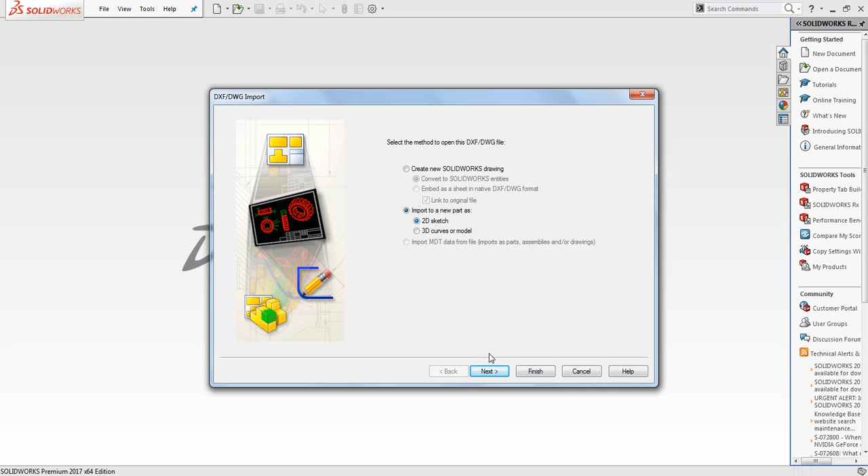Okay, so we'll go in and import or open the DXF file. Take this one here and import to a new part as a 2D sketch. Next, and then finish.

And then I go in and I'm going to delete these lines here. Once I've done that, I can select this and edit the sketch.

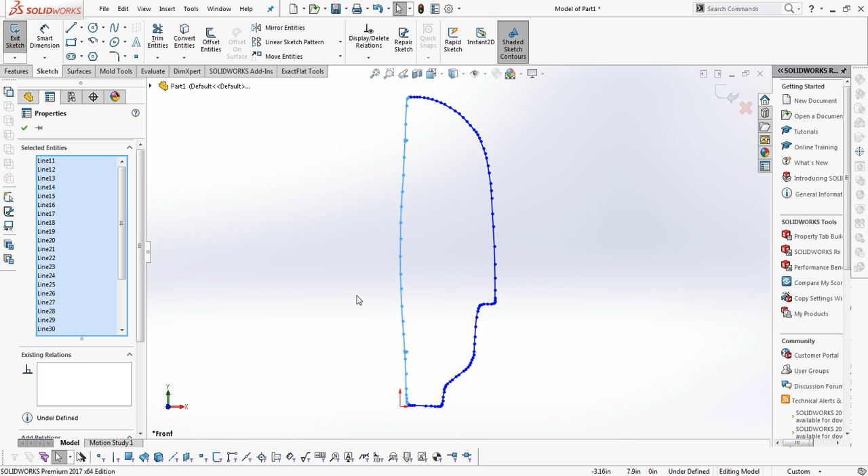Then I would select this group of targets, and go into Tools, Spline Tools, Fit Spline. Then I delete the geometry and just hit the green check box, and that's created that one spline there.

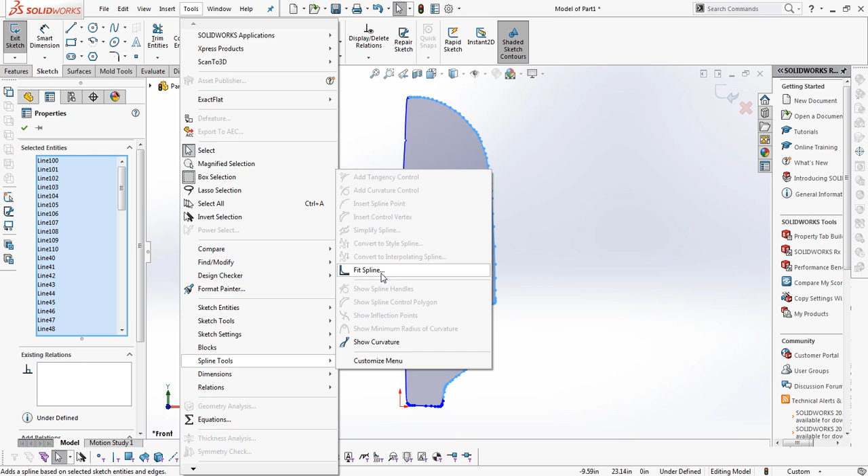And I would do the same for this section here, actually this whole section. Same thing - Tools, spline tools, fit spline.

And then these pieces here - Tools, spline tools, fit spline - and that's how we created that.

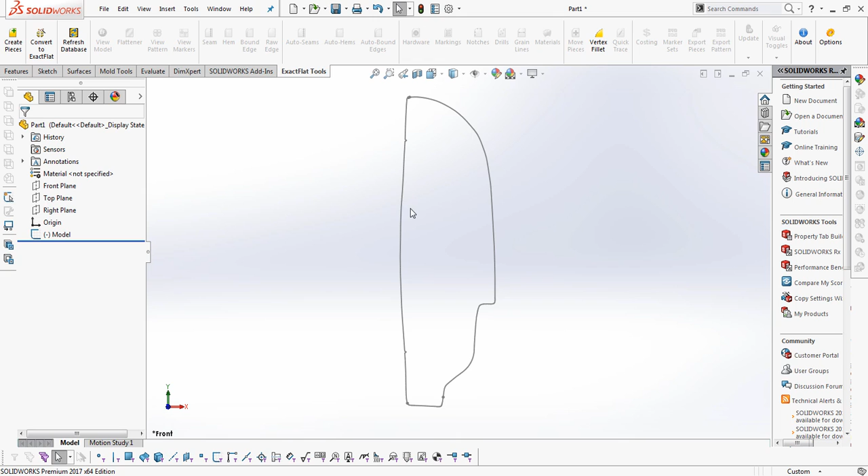Once we've got that done, I'll check that off, and then go to model, edit, insert surface planar.

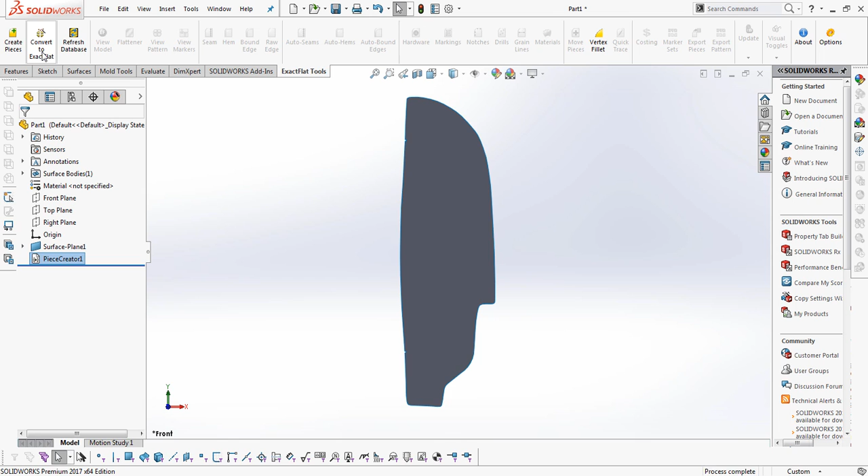So when we go to create piece, we select this, create piece, hit the green arrow, convert to ExactFlat, select the material, hit OK. You have to go through the flattener even though it's flat.

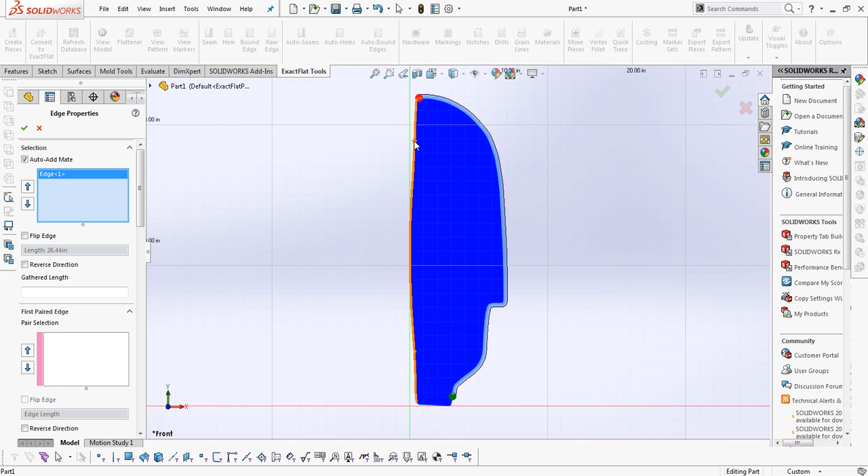Hit OK here, and then we go into our pattern view, and we can add our seams. So seam there, seam here, and seam here, and then we just go down and select what type of seam type we want, say 8 mil.

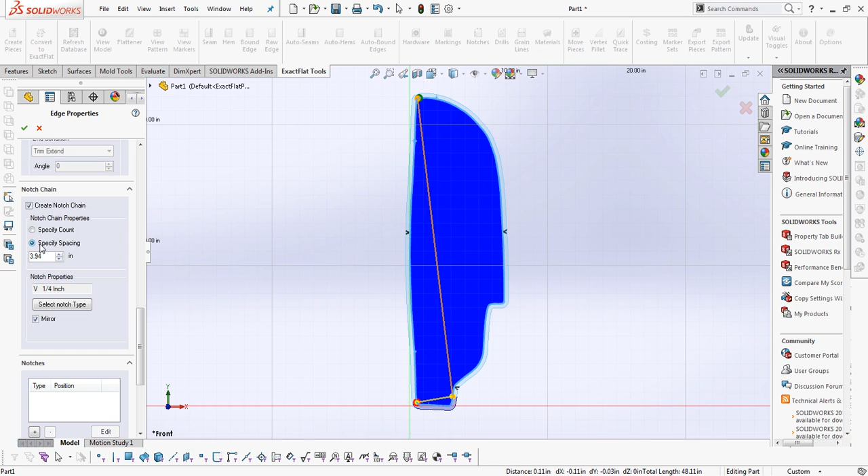Then we add our notches, say a quarter inch V-notch, hit OK, and we will create a spacing of about 3.94 inches, so it's added all the notches around there.

Simply hit the green there. So we've got our notches, we've got our seam.

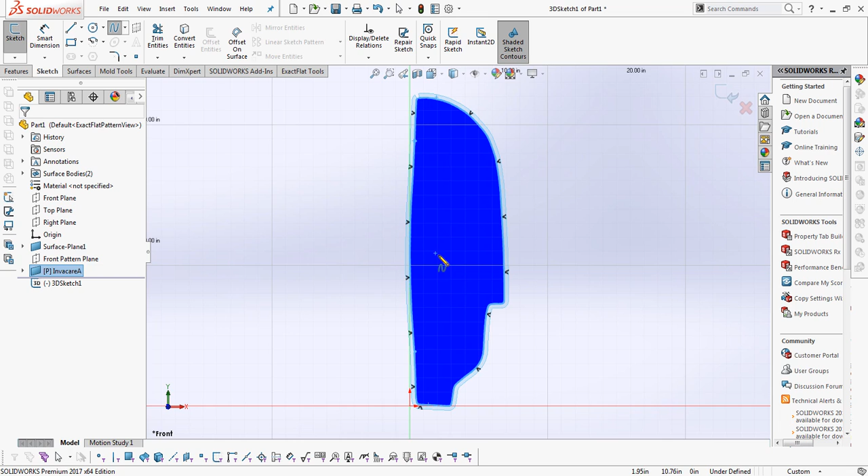Now if we want to add something like Velcro, we could go in, 3D sketch, select this, spline on surface, and I could just draw a line here, say here. I hit the checkbox there. We've got our line here.

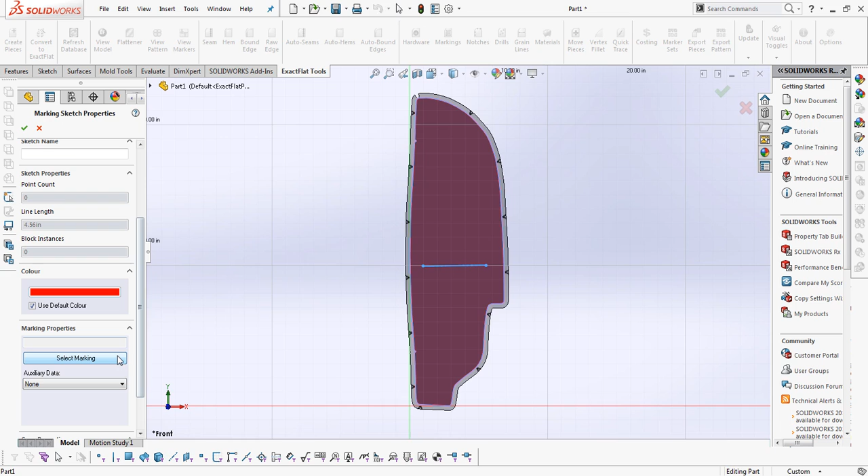Then when I go into my ExactFlat Tools, I can go to markings, select this - so I've selected that piece as the piece to be marked. I select my marking type. I don't know if I have Velcro, I could add it quite easily, but let's just say it's a sew line.

We'll just say that sew line there. Hit OK, and then we'll check that off. So we've got our sew line here, our notches, and our seam.

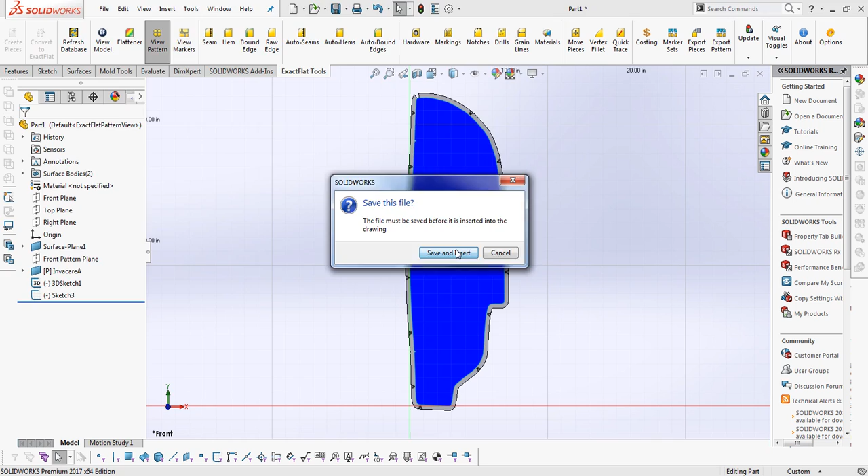Then we could go in and file and create a drawing from the part. I'm going to save this and just hit OK. And I'll bring the piece in. So there's our part there.

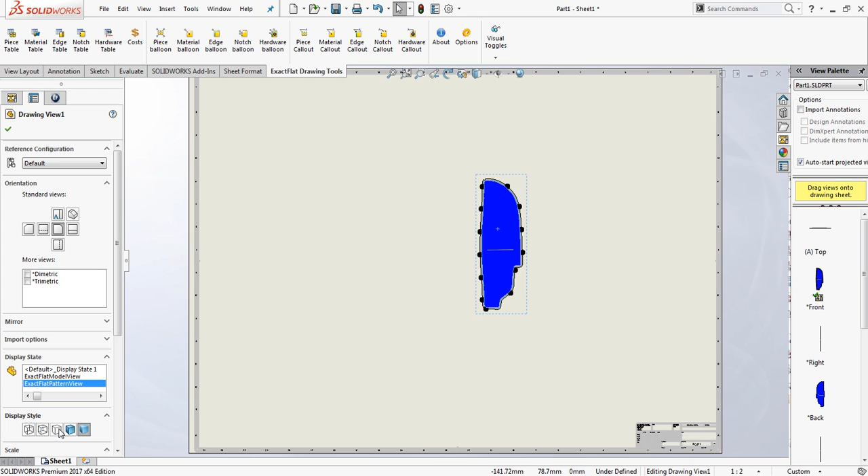If I want it to be in color, I can go in and shade it, so it's that blue, or I can just leave it like that. So now we have our drawing.

I'll go into my piece table. If we had a bunch of pieces, like those 5 pieces, they'd all show up here. Material table - so that's the material we're making. I can do a cost, so the cost of the piece.

And then I can start doing a notch table for all the notches we have. Okay, and that'll show the spacing, and I'll zoom in in a second.

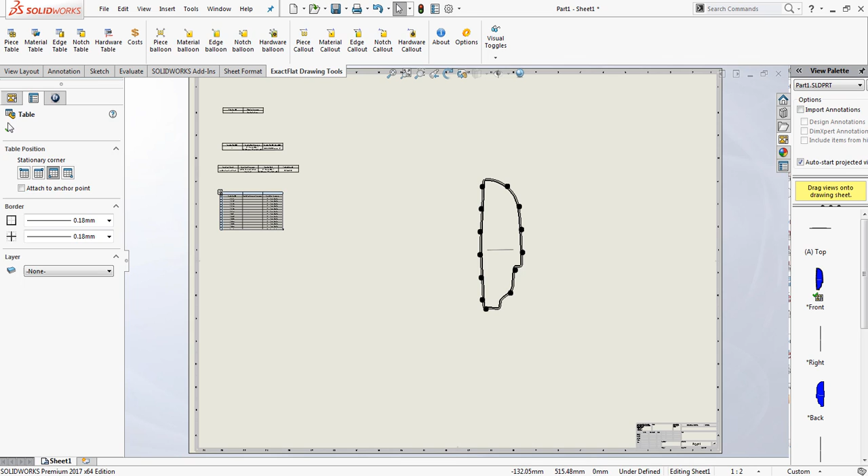Then I can do a balloon, a piece balloon, and then I could also do a notch balloon, and it'll create the notches there. Same thing if I just click that.

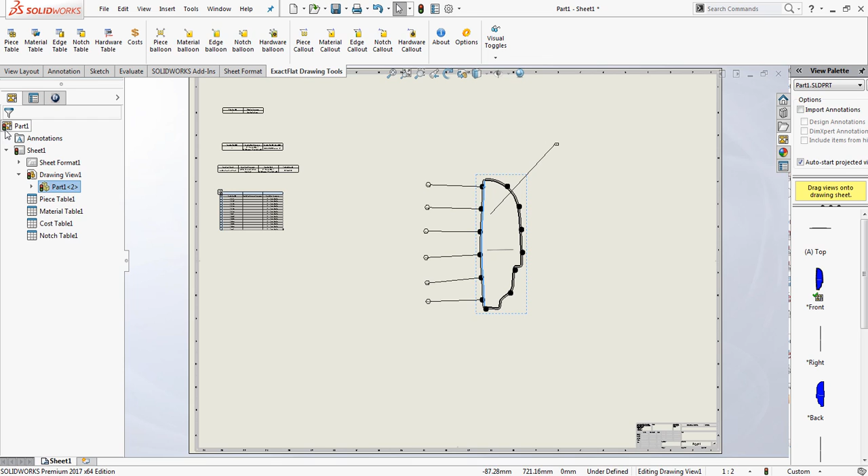So let's just go and take a look at what I've done. I've created my notch balloons here - they've given all the notch types and identified those notch types.

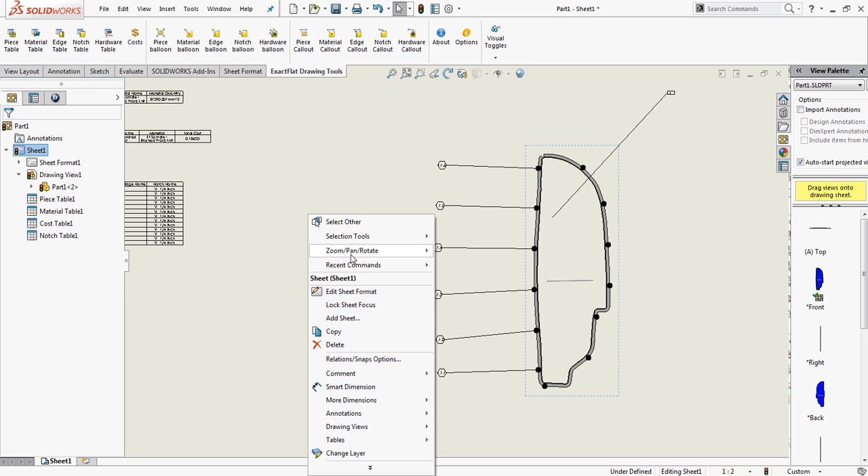I've done my... if I go over here, I'll just pan over here and we can zoom in and see some of these features here.

So this basically gives us a notch ID. If we had a notch name for each notch, we could have it over here. The materials identified, the material quantities identified - it's given us an auto marker set and a cost of 18 cents.

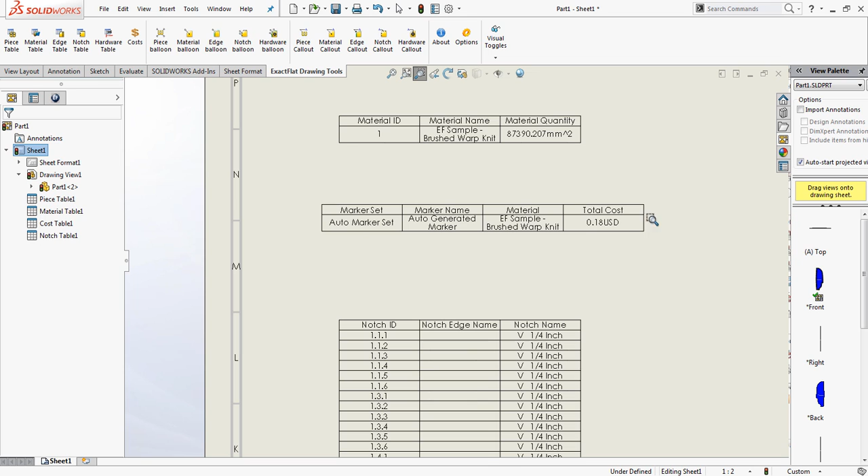And those are fictitious numbers because I think I basically just have a penny a foot for the material, but, or maybe 2 cents a foot, I don't really know.

Anyway, so you can do the drawings quite easily, and it's all done in ExactFlat and SolidWorks. If you have any questions, give me a call.

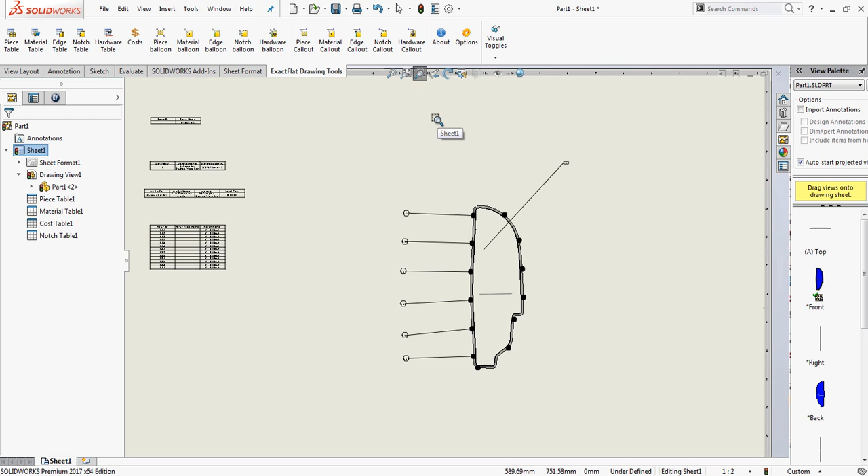Sorry, one last thing I forgot to mention - basically I have a hardware balloon here that I can add, which would be on that piece there. And if you remember, that was the piece of Velcro that we added.

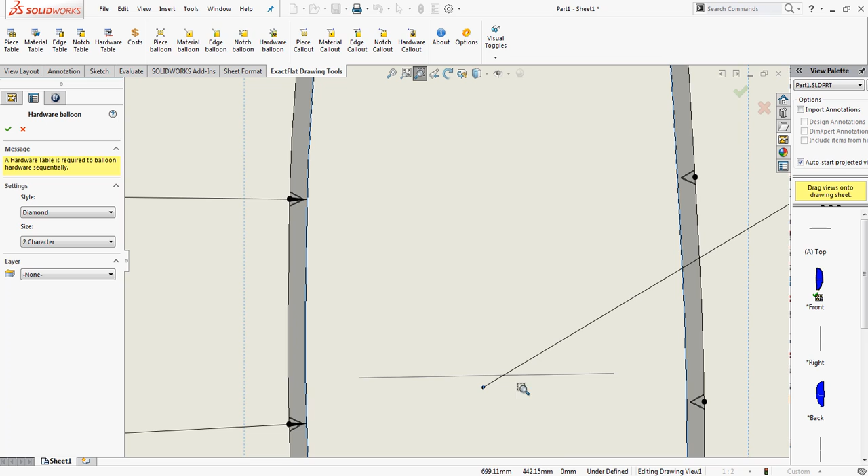So just zoom in here, but yeah, I guess I should move my balloon, but basically that was the hardware for the Velcro or the sew line that I added, and I've created a balloon out here which would be the identifier of that, and then if I do a hardware callout on that piece.

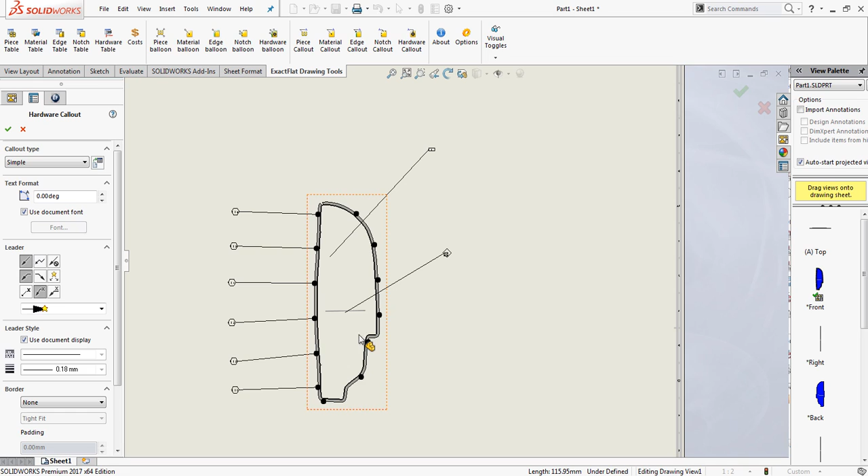I can create that also - it's just basically a hardware callout, add there, and we can select what we want to show it as, but basically it allows us to do all these things in the same software product.

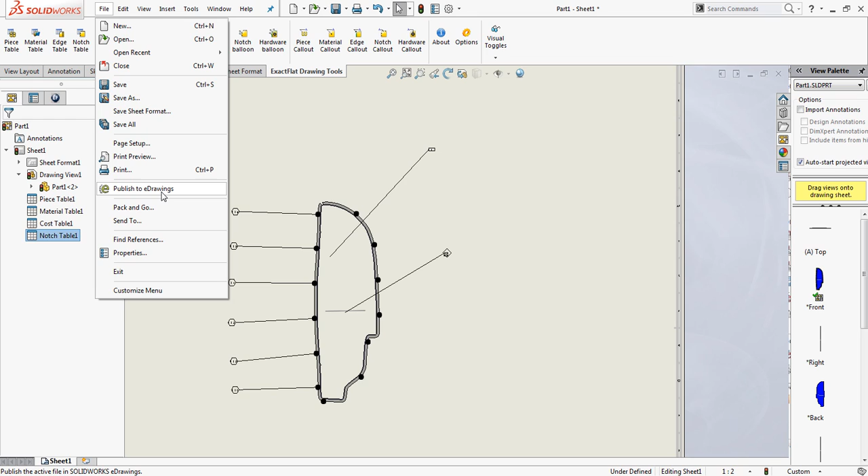We can also do things like publish this to eDrawings. We can do things like create the bill of materials, which is more of a SolidWorks thing. But all this stuff can be done in SolidWorks and ExactFlat.